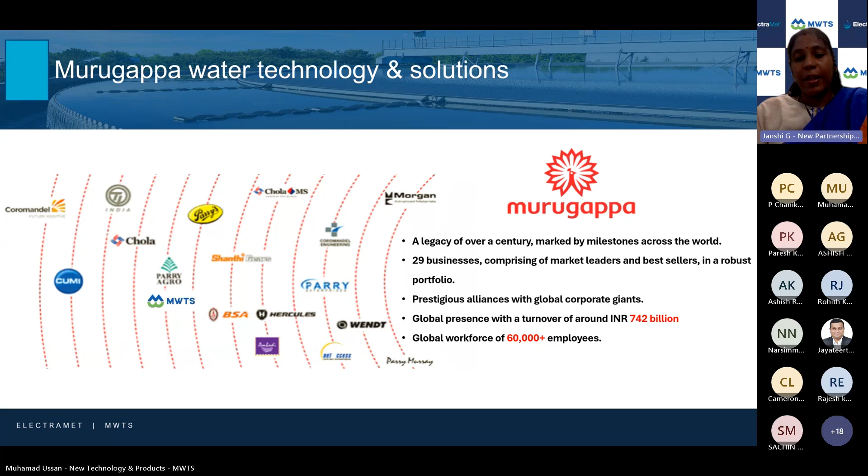We at Murugappa Water Technology and Solutions are a total sustainability and water management solutions provider in the space of water management for more than 4 decades now. I think we are close to around 450 plus assignments completed successfully. We operate under four major pillars, or the business verticals, I would say, to provide the services.

They are the automation. We're there in the complete digitization and automation of your plants. We are there helping the industry with our chemical solutions. I would say rather than a product, it's more of an assistive chemical solution. We are there providing the engineering as total EPC contractors, and we are also there in the service segment providing comprehensive operation and maintenance for the plants which we deliver, as well as the plants which are already there. We do the plant health audit, and we can deliver you a complete operation and maintenance platform. So that is about MWTS.

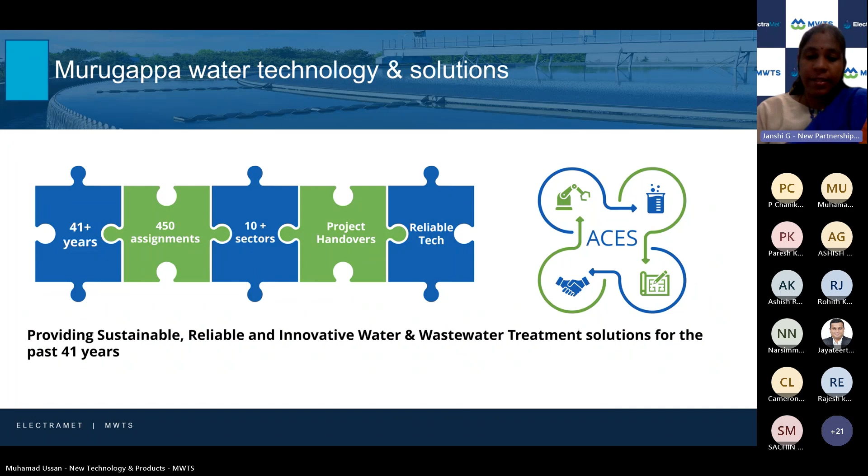So coming to ElectraMet, it is an innovative solutions provider in the field of resource recovery. The focus here is on recovering resources of economical value from the tougher effluents or wastewaters, like from your battery recycling, your mining and metals, your microelectronics and electroplating industries, wherein there is a stress in terms of compliance, and the need of the hour is how efficiently we recover the rare metals or the metals of economic interest.

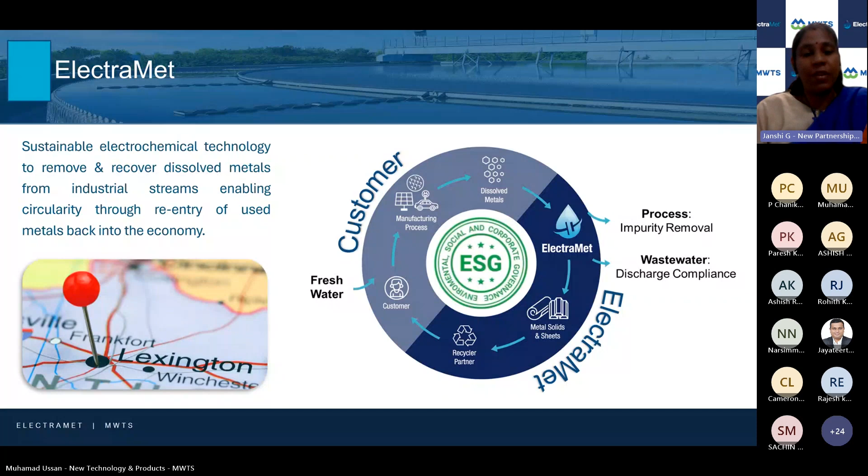So ElectraMet is different from other resource recovery, as Mr. Cameron will explain on the differences. How does it differ from the other technologies out there? So basically, from the US, ElectraMet and MWTS have taken up a joint solution delivery for the Indian market.

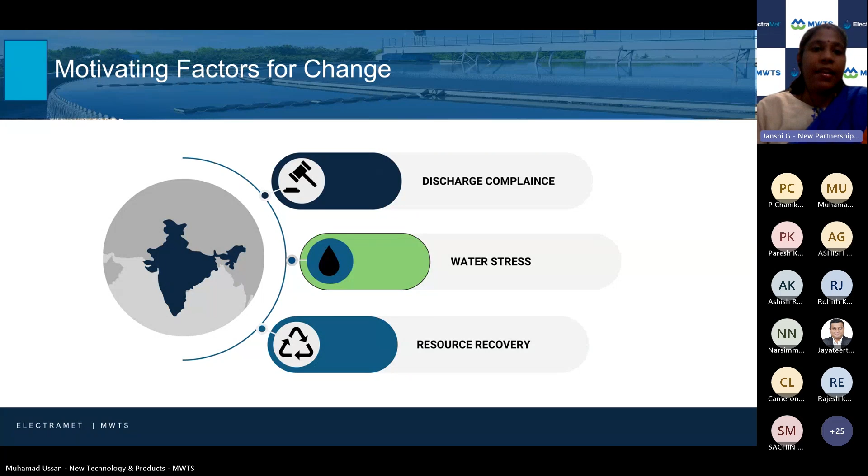Why in India? Because we could see, with respect to these two industries, they are emerging fast, and when the industries grow up, obviously the need for water also moves up. So there are regulatory norms over there. There is water stress, and what is more positive is that there is a secondary or auxiliary market that is getting developed for using the recovered resources from the waste, which otherwise will go unnoticed, and will also pose a challenge of managing them as hazardous waste, wherein there is always a thought behind to recover those valuable metals rather than creating a threat out of it.

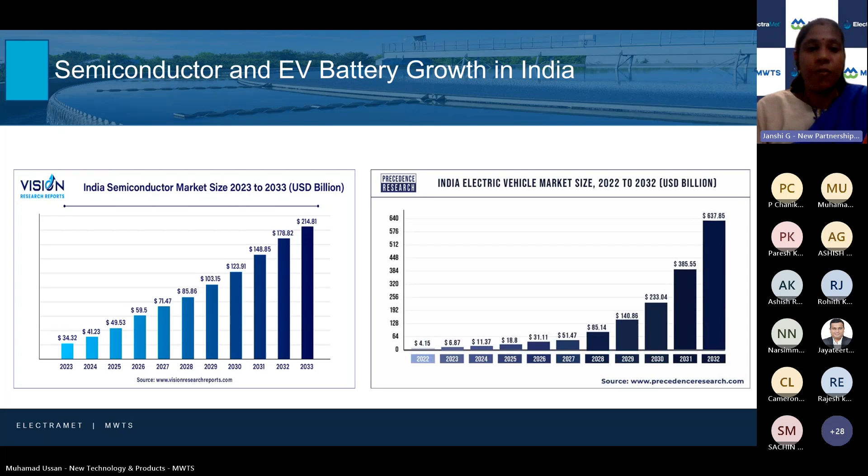So we could see from various marketing insights that definitely India is picking up in terms of the semicon industries, being the fab production or the ATP facilities, and we could see more maturity gaining in terms of the EV segments and the associated battery production, and not leaving the tail end, the battery recycling. The market is getting more matured in terms of battery recycling. When we interacted, we could see more structured processes being set up, and more expansions going on in the microelectronics and battery recycling space.

As we grow in the EV space, probably around the next 3 or 4 years, we'll have to face this challenge of recycling all the end of life batteries from the various vehicles we put on road this year and next year. So the focus towards India is more because while we currently map the global supply chain, the present scenario is that there is an intensity, we don't see much diversification in the supply chain, because as technology providers or resource availability, there is a density in a particular geography, and we could see this trend slowly getting diversified towards India and other Asian countries as well.

So we could see India gaining more momentum because of this current situation, and people either want to become independent, or I would say, like in terms of Atmanirbhar, or they want to create or have multiple choices for the supply chain to go around smoothly without any interruption.

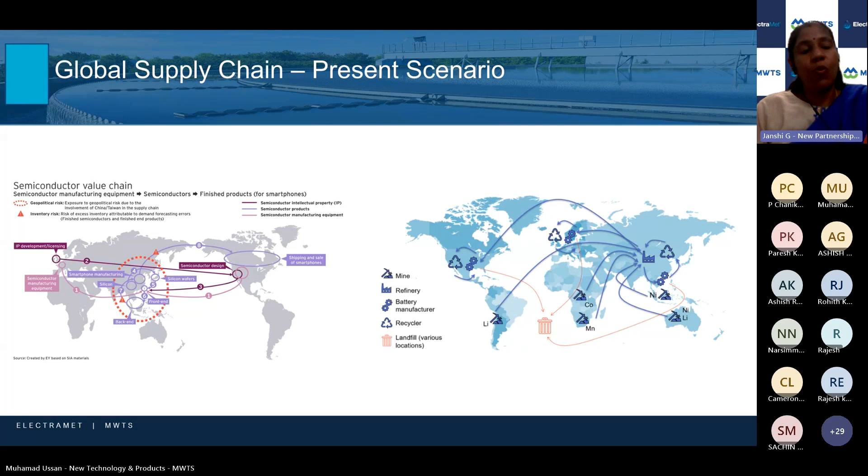With this note, I hand over the deck to Cameron to take us through the application of ElectraMet across both the industries, touching upon the semiconductor as well as the battery recycling. Maybe he'll start with the general flow application, where it describes where ElectraMet is getting pitched in. Over to you, Cameron. Thank you, Janshi.

Yeah, so when we're looking at wastewater in the industry, every facility seems to think they are unique in their water, but if you take a high-level view, every wastewater application has the same general process. You have the target constituent you need to remove, and then you have pre-treatments to get the water to a suitable state that you can process that impurity you need to remove. Then you have the post-treatment, which is typically the final polishing steps you need to meet discharge compliance. Usually some sort of pH adjustment step to neutralize acid or acidify caustic.

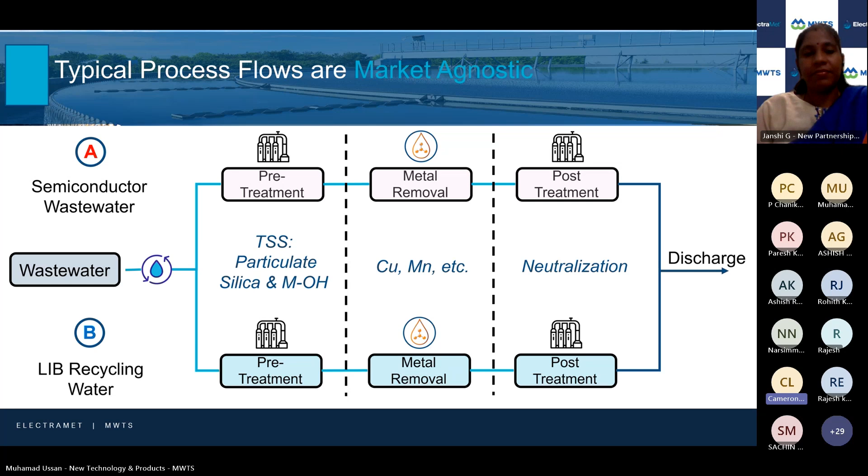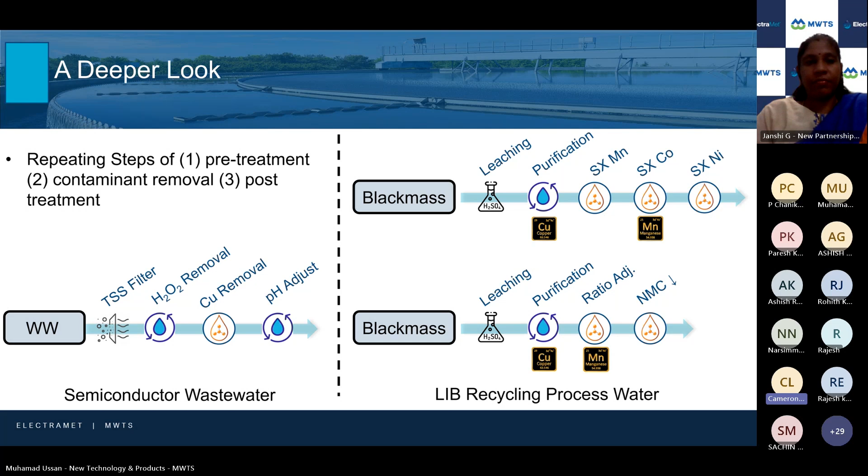And if you look at really every industrial facility, especially in these two industries, you see the same steps repeated again and again. Usually solids, then your target metal, and then neutralization. And so take a little bit deeper look at the specifics of the semicon markets versus the black mass refining, the battery recycling process. There's always going to be a solids handling issue. Then you're going to have some sort of general purification to get the water to spec, target metal removal, and then the final polishing step. So in this webinar, we're going to start with the semicon process and then finish up with the battery recycling.

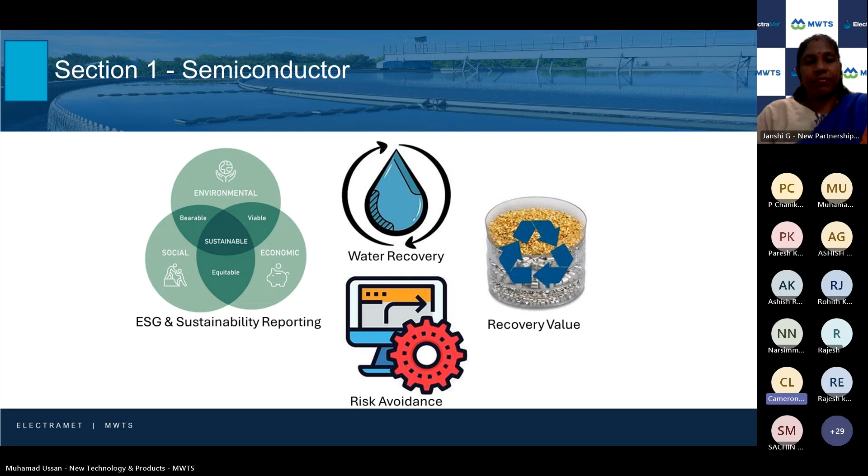And we're looking at the semiconductor market. Not only do you need to meet discharge compliance for environmental regulations, there's now growing pressure to do it sustainably, to use less water or recover water, and to send less waste to landfill. And current incumbent solutions really struggle to do all of this. They're good at meeting compliance, but not so much with the rest of these ESG recovery targets. Next slide, please.

And this is because there are a variety of different types of wastewater in the semicon site that are very, very different. And the incumbent solutions are designed to treat one but not the other. And so the net result is an inefficient process that is really unsustainable. And the two main sources are shown here. The copper CMP is the chemical mechanical planarization process. This is where they polish down the wafer to make it nice and smooth for the chip manufacturing. This is typically processed in-house for wastewater, and it uses probably 30 to 40% of the total water in a fab facility.

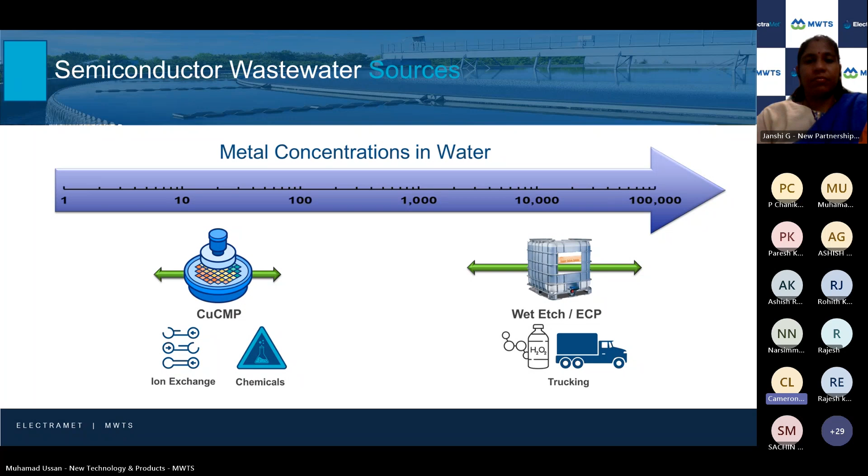And then on the extreme side, you have these wet etches. So these more bulk removal processes tend to be much, much higher concentration, but lower volume. And they also contain a lot of hydrogen peroxide. So the combination of hydrogen peroxide plus the high concentrations of the metals makes it very challenging to treat on site. And so they typically just truck it off. So now there's very expensive trucking costs and very unsustainable environmental impacts from the trucking process.

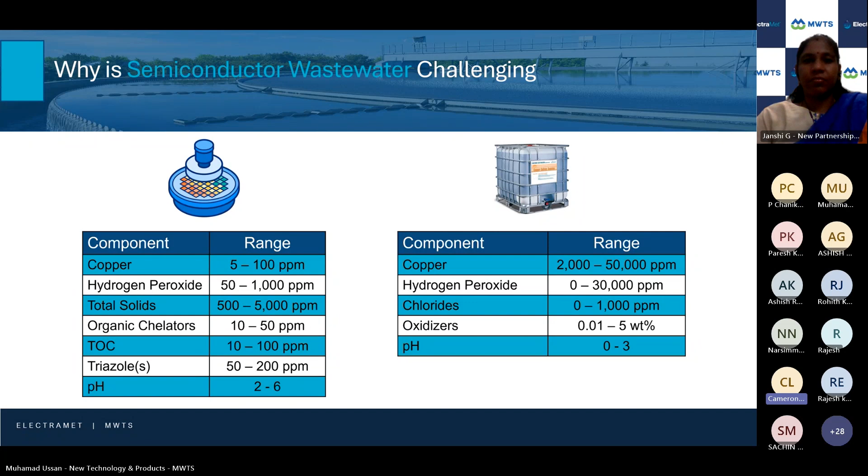And the reason why these waters are so difficult to treat is because there's a lot of stuff in there. If you have pretty clean water with one target constituent, it's pretty easy. For the CMP on the left here, the target is the copper. But you have a lot of hydrogen peroxide in there, solids, organics, and these all tend to negatively impact standard treatment solutions. On the right, you just have a significant amount of copper. That makes solutions like ion exchange chemicals very expensive to process it. So importantly, you have just large amounts of unknown chemicals. So this combination makes it challenging, right?

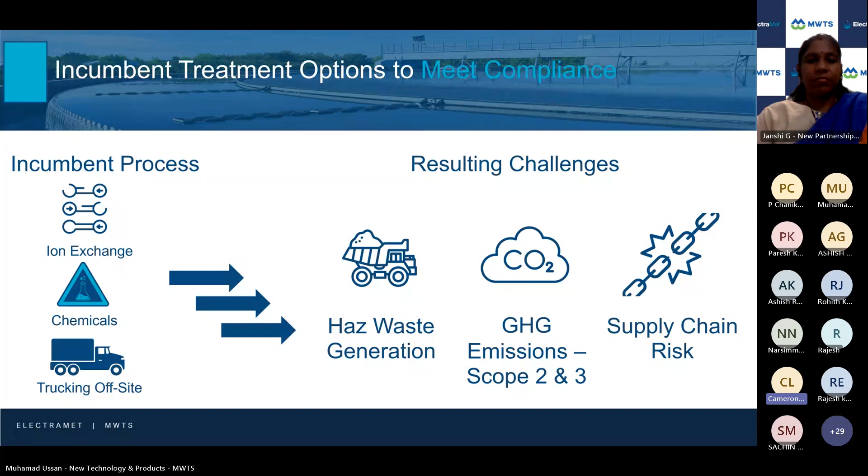As I said, the current incumbent processes have been designed to meet discharge compliance, not necessarily do it sustainably, right? They work very well when that was the only option, right? We now have new options. So if you want to do discharge compliance, meet environmental regulation, and also do it sustainably, we need new innovative solutions.

And then you're looking at, what is the right tool for the right water quality? And this is where the existing solutions are suffering. You can see here in the green, ion exchange, that's very good for the CMP waste, but doesn't work for the concentrate stream. And you look at the electrowinning, it can process part of the concentrate, but it can't get down to discharge compliance. And there's a huge gap in the middle here around that 1,000 ppm range where there's really no viable economic solution.

And that is why they tend to truck off that concentrate instead of processing it down to discharge compliance. Because either way, you have to do some ineffective, unsustainable, high-cost solution to cover that gap. And ElectraMet has solved this problem by using electrochemistry and developing a series of reactors that can process the entire concentration range in a single skid.

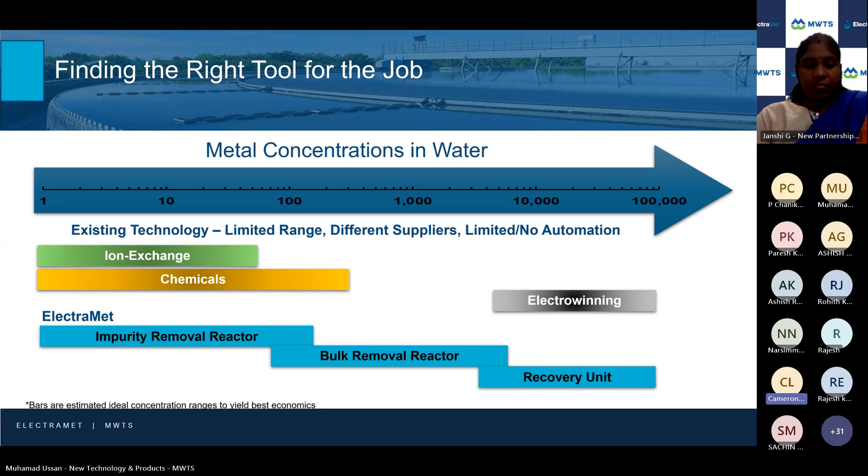So whether you're starting in the lower ppms that you see in CMP, or you're starting at the high concentrations that you see in the wet etch processing, our solutions can then process it all the way down to environmental compliance and discharge regulations, while also recovering that copper as a value add and not sending waste to landfill. Next slide, please.

And we've been able to do this by taking the lessons learned from electrowinning, taking those core concepts of how to plate metals and modify the reactor design to make it more efficient at lower concentrations and make it more selective. So we use a porous carbon cloth cathode, you can see in the picture there, and that is where the water is flowing through. So now you have a lot of high water electrode contact area, which overcomes mass transfer limitations, and that allows you to hit the lower concentrations in the effluent. So we put this in a complete system. You can go next slide.

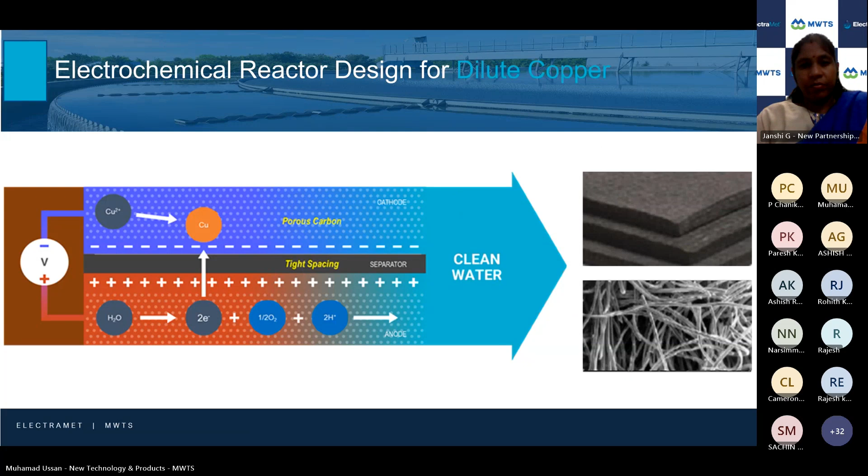So putting this complete process flow for the wastewater at a fab facility, you still got to handle the solids and the peroxide because they can negatively impact the electrochemical treatment. But the key benefit of electrochemistry versus ion exchange is if there is residual peroxide, it will not destroy our media. Hydrogen peroxide will decompose ion exchange resin. If hydrogen peroxide enters our system, it's just a modest inefficiency that it creates. So we'll use the energy to break down peroxide instead of remove copper. So through a combined process, we can develop a more efficient system.

And now the net sort of waste product of our process is a high purity 99.99% pure copper metal. So you can now recover this as a new revenue stream, which helps reduce the total cost of ownership of this process, but also helps you meet ESG goals by not sending any waste to landfill. And more importantly, for every pound of copper that's recovered, that correlates to about 4 to 6 pounds of CO2 that is not emitted because you no longer have to mine that little bit of metal from the virgin ores.

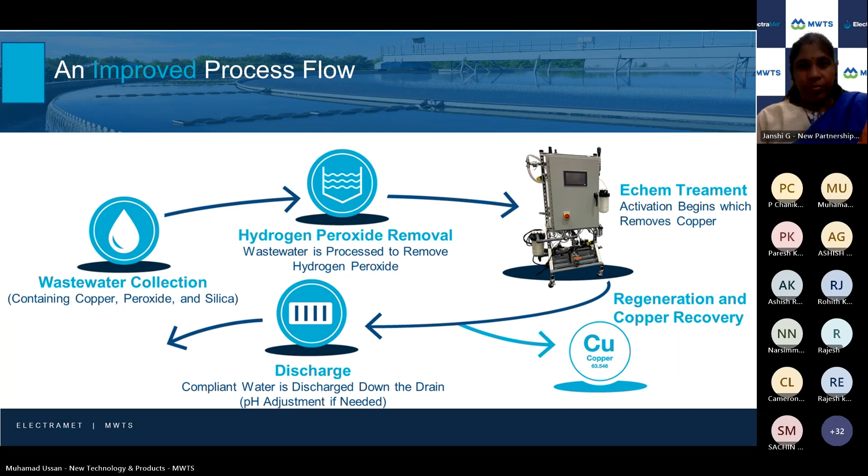Next slide, please. So Janshi is going to take a look here on how the really total process flow comes into place from pre-treatment to metal removal to then post-treatment. Over to you, Janshi. Yes, thanks, Cameron.

So, like Cameron was explaining in depth on how the metal gets recovered, for the complete solution for the wastewater from the battery recycling industry or the semicon, there's going to be a set of pre-treatments to remove the suspended solids because, as explained, this is a porous carbon cathode. So we don't want the recovery of TSS happening in the cathode and the entire cartridge becoming a particulate filter. So we tend to remove the TSS well before it enters into the metal recovery unit.

And depending upon the metal, there is an effective pH that plays an important role. So depending upon the metal to remove and to what concentrations, there could be adjustments in the pH. And this entire technology can remove peroxide, but that is not the intended goal, because we are focusing to take off the valuable metals. So we have a more economic solution for the peroxide removal so that it doesn't interfere with the core technology. But the difference is peroxide does not have a detrimental effect as it does to the ion exchange technology. So we can take care of the peroxide well before the system.

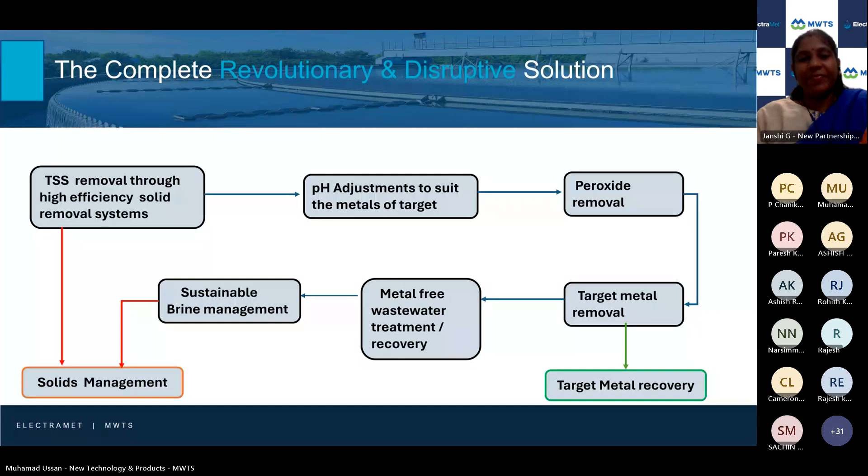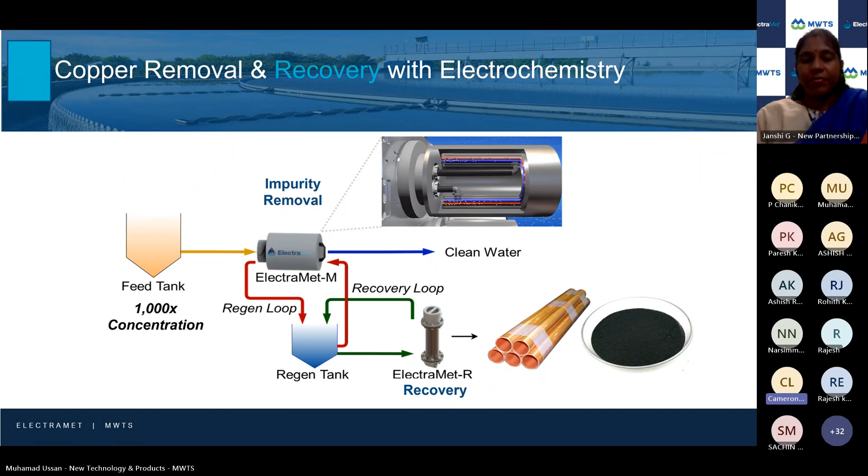Right, we now have gone from what is typically a very dilute metal stream to a highly purified concentrate in acid, which is now perfect for electrowinning. And by doing this, we can have a total solution closed loop process to go from metals in the wastewater to a high purity value add product. Next slide.

And we have been doing this for almost 3 years now in actual fab facilities. Taking CMP wastewater off of this process has a very dynamic feed concentration, but because we operate using electrochemistry, it can automatically adapt to incoming process concentration changes and still meet their discharge compliance. So for this fab facility, the limit was 2.07 ppm of copper.

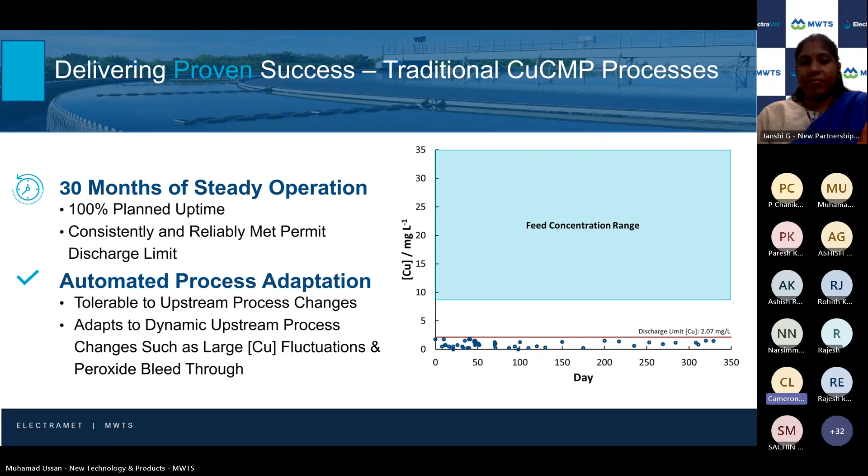And taking on the other side, the extreme side, the wet etch, the electrochemical plating, the higher concentrates, we can now use this combination of our electrochemical reactors to go from very high concentration down to environmental compliance. And we can do this very efficiently from an energy standpoint, but also very efficient from a time and labor standpoint.

And once you get down into the 8,000 ppm range, you start to see the voltage tick up a little bit. And this is happening now because in this reactor, there's a big gap between the anode and cathode. So mass transfer has a challenge. So you have to get that metal molecule from the water to the cathode.

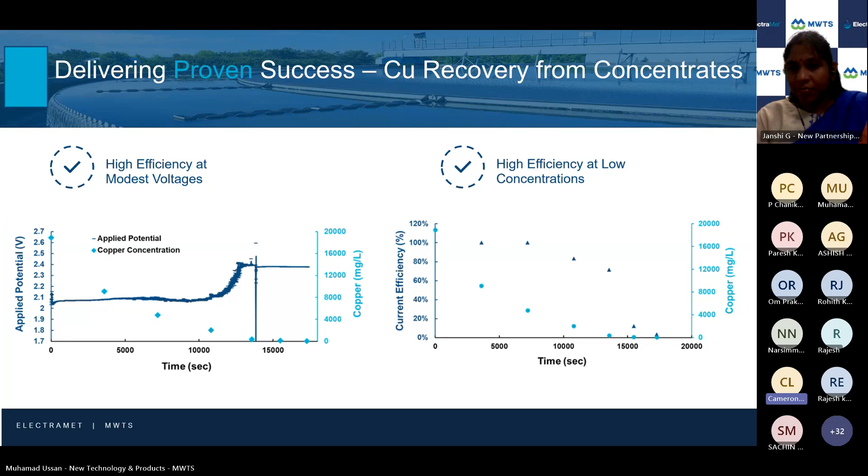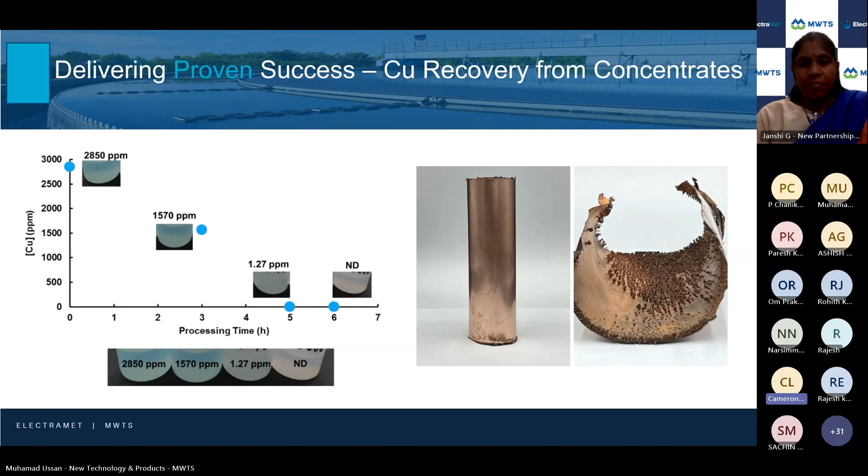We then use our mid-range delta system to take it from 3,000 ppm down to anywhere below 500. And this one we kept going, it's very linear. So that means you have the same efficiency down to about 1 ppm. And in this case, that met discharge compliance. There are always going to be some water matrices where the efficiency will drop off around 500 ppm. In that case, we would switch to our other reactor. Next slide, please.

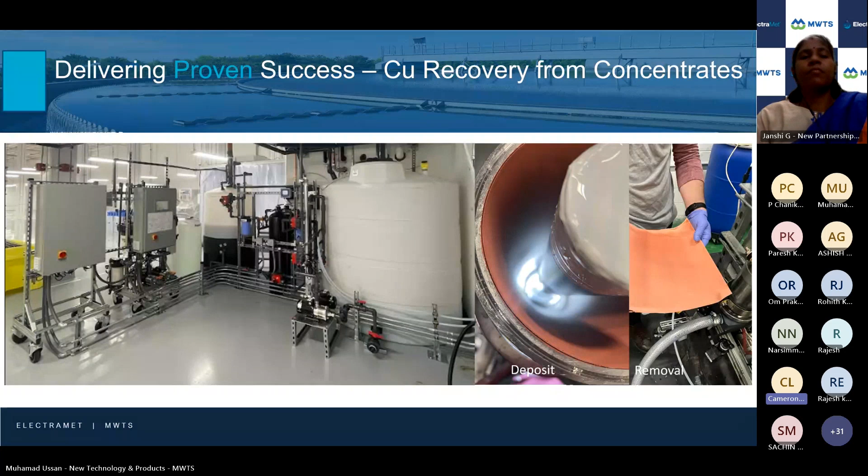And so here is an example of one of our small installations showing the small footprint. Because of the high efficiency and the modular nature of this process, it can be very easily retrofitted into existing facilities, or for new builds, it can allow for more room for production facility because it's a small footprint. We don't need a large space to implement this wastewater treatment system. And on the right here, you can see some of the copper pulled out of the tubes. And so that's going to conclude the semiconductor portion of the webinar.

And now we're going to switch gears a little bit over to lithium-ion battery recycling. And so this has been a very active area all across the globe. And if looking at how are these batteries going to be recycled, there's really a few different methods. You can do it directly, direct recycling, which we take the battery cathode material, do a little cleanup process, and put it right back into a battery. You have the hydrometallurgical process, which is you're going to shred the battery, get the black mass from the electrodes, dissolve it in some sort of leaching solution, and then separately isolate all the products you want. This is very similar to what is done in the mining industry.

And then the current method that's done today at a large scale is pyrometallurgical. This is where they're taking existing furnaces and refineries and taking the black mass from the shredded batteries and putting it into a smelting-like process. So it works, but it's very energy intensive and very environmentally unfriendly. Most of the new facilities being built are doing a hydrometallurgical process, mainly because of the lower CO2 footprint, lower energy requirements. Next slide, please.

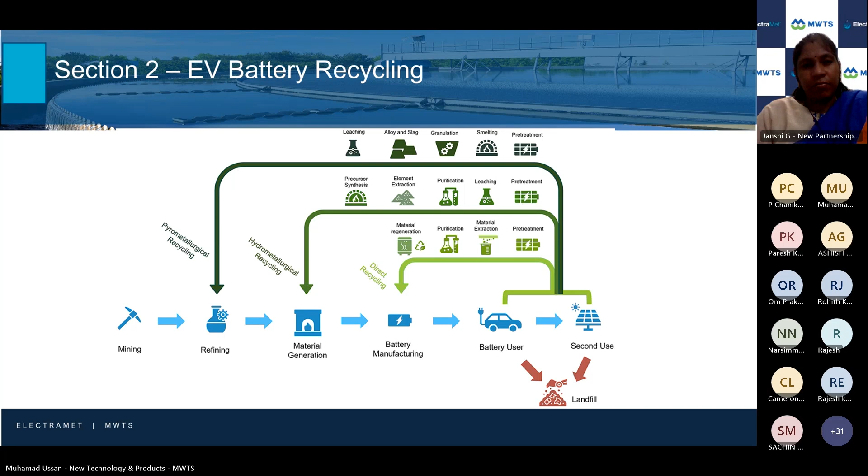And so where ElectraMet can fit in is battery recycling has usually very complicated flow sheets. Removing bulk metals is pretty easy. There's lots of solutions to do bulk recovery. But in the battery recycling process, you need to hit battery grade products. That is a very high level of purity that needs to be achieved. And ElectraMet can bolt on after these bulk removal processes for more efficient, higher purity products at the end. Next slide, please.

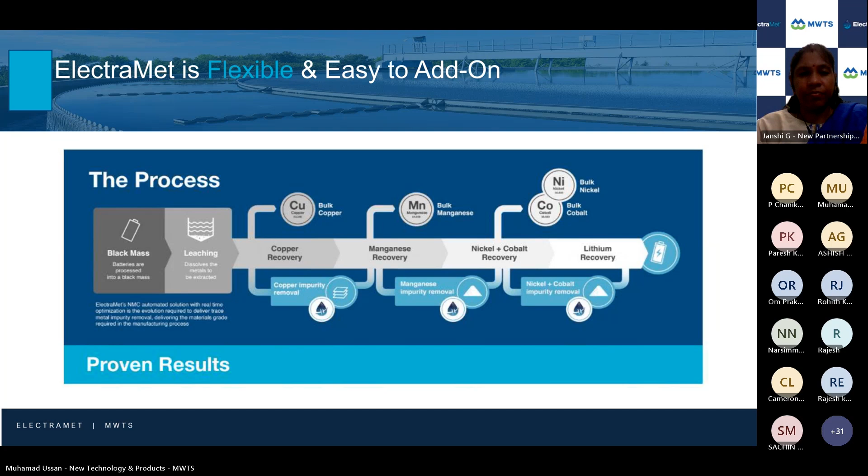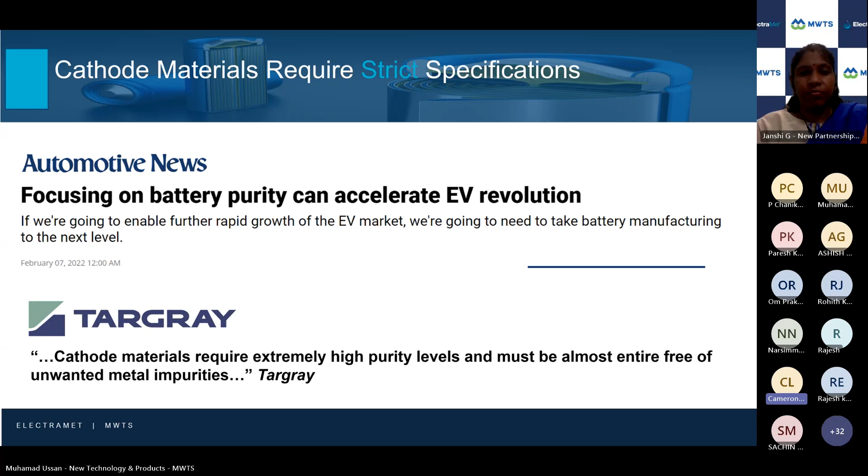And why purity is important is even the smallest bit of impurity in a battery can destroy its performance. It can reduce, next slide, please, reduce lifetime of the battery. Next slide, please. Right, it can reduce the performance, so it won't have many charge cycles. So instead of getting your 200 miles of range, you might get 30 miles of range.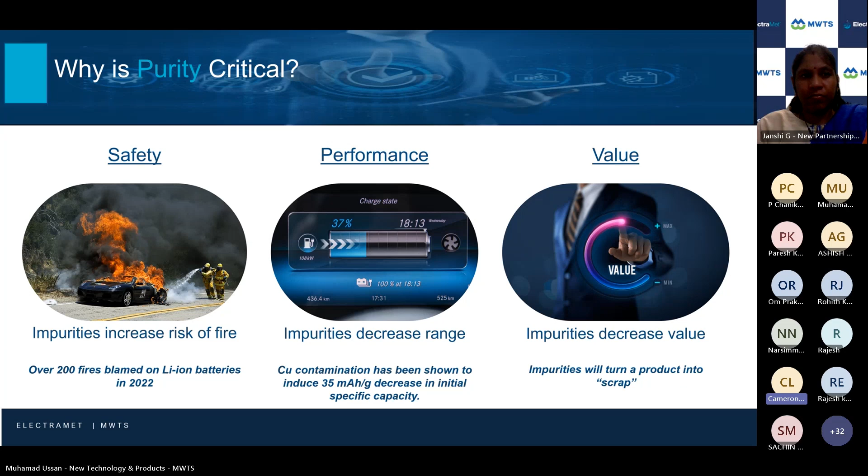If you have these impurities, it can result in unwanted reactions within the battery, and that is a big risk of fire. It doesn't become could a fire happen? It becomes when will the fire happen? So a lot of safety concerns will happen, and there's a lot of increased value in battery grade versus these technical grades because of the high need in these batteries. Next slide, please.

In the recycling process, there are really 3 pillars you have to hit to have a sustainable and viable operation. You have to have high yields. You have to have good economics, both of your operations and of the product you're producing. And you have to have high purities to be battery grade. Hitting 2 out of the 3 of these is very easy. Hitting the 3rd one is near impossible with today's solutions. It can be done on a very small scale, or it can be done on an absolutely massive scale. But most plants will operate in that mid-range where we need new innovative solutions to hit all 3.

And it all depends. Go ahead. Yes, the Indian industries are growing with this pyramid. We could see a lot of firms hitting the MHP and metal salts, growing slightly towards the pre-CAM and CAM. But as you rightly said, evolving towards high purity battery grade materials is more emerging. So it is even nascent, but I think we will mature more in that.

Yeah, so it's all dependent on what product you want to make. And what we're seeing today with people in the US, Europe, and some of China is the main focus is get lithium out - that's pretty easy to do by itself. And then make MHP. It's very cheap to make MHP, but there's not a lot of margins. So it is only viable now. It will not be a viable product in the solution.

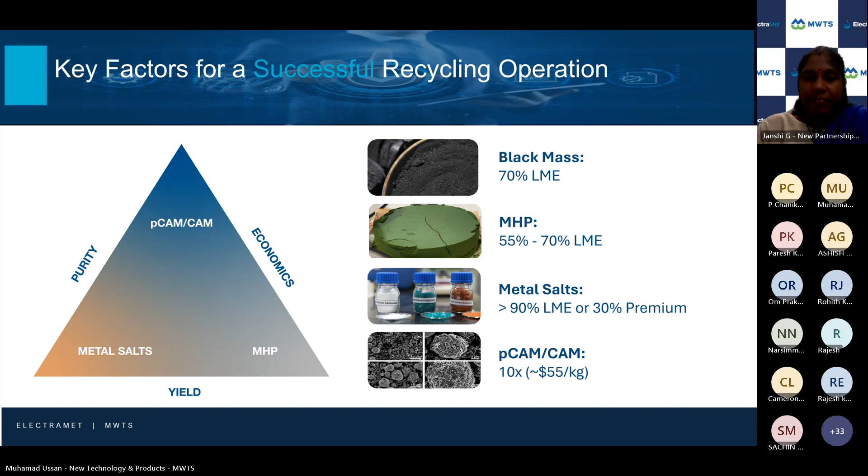Right, if you don't have that purity, you can't make your products. You just have a commodity metal, which is now not competitive in a market versus other ways to get commodity metals. So what I've done here is pulled a number of specifications from a variety of PCAM, CAM, and battery grade metals products. You can see copper is a big one, manganese is a big one, and cadmium, right? But there shouldn't be any cadmium in EV batteries in the first place.

We have seen a number of black mass providers that have cadmium in it, and this is most likely coming from people mixing in nickel cadmium batteries. Even one battery in a large recycling plant can produce enough cadmium to be out of specifications.

And if you look down at the precursor NMC - so this is the nickel, manganese, cobalt type lithium-ion batteries, these are the cathode materials we're using for these higher value EV cars, these higher ranges - the purity requirements are very strict. Standard hydromet processes used in the mining industry cannot hit these targets, or they cannot hit these targets while meeting the required yields to make a viable economic business.

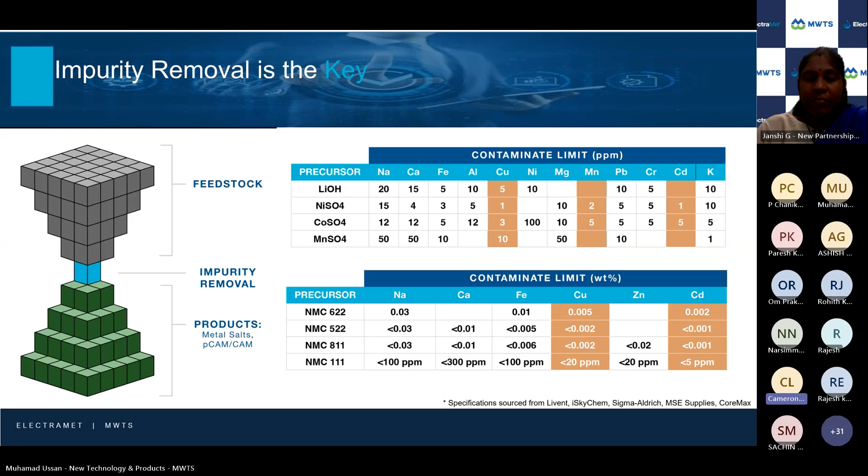So here's going through a little example: if you have a standard black mass composition shown on the left, what kind of values can you get out of it, shown on the right? On the top right is just showing, on a purely same mass basis, what is the value of the different products. You can see that CAM is extremely valuable compared to everything else - that is the most valuable product. Battery grade metal salts are also very valuable, but if you only hit tech grade, you're going to lose a lot of value. More importantly, if you normalize it based on what you can get out in the yield, based on the black mass composition, this bottom right figure shows what kind of operation you could get. And it still shows making CAM is the most value you can do.

The metal salts, if they're battery grade, could be very lucrative. The challenge is if you don't get to battery grade and you hit tech grade, that is going to be significant value loss, because the cost to try to get to battery grade is going to be very high. And if you have to reprocess your solution again to get to that final grade, it's going to cost you a lot and ruin your economics.

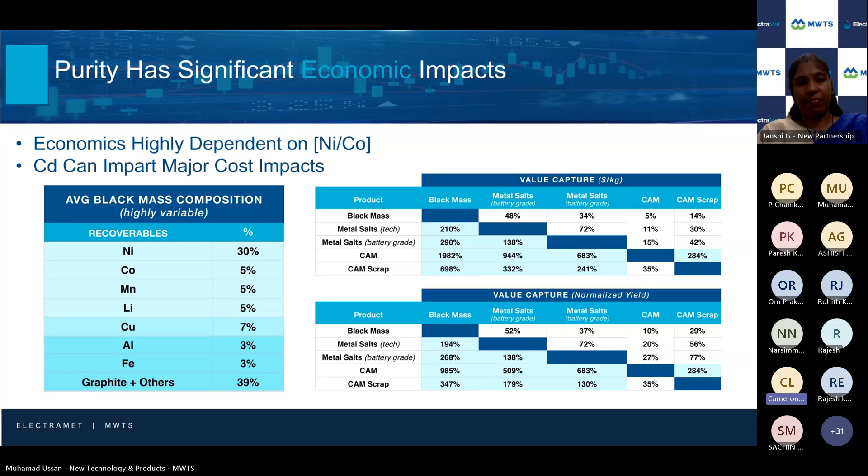So looking at impurity removal - what are the different methods and what are the main impurities? From what we've seen, the biggest impurities causing problems are copper and manganese. How they fit in will depend on what product you're making. So on the bottom left here is a very high-level flow sheet of a process to make different battery salts. The goal is to make cobalt sulfate battery grade, nickel sulfate battery grade, and manganese oxide or manganese sulfate battery grade. Once you leach it, there is significant amounts of copper in the black mass coming from the current collectors of these batteries. Now, getting the bulk out is pretty easy.

You can add sodium hydroxide as a base to precipitate out iron and aluminum, and maybe 90% of the copper. But that's still not enough. So typically what they would do then is sulfide precipitation or ion exchange to try to get it all out. This results in significant yield loss, which means losing economic viability as a business.

Looking now for manganese, typically you add some sort of oxidizer to precipitate it out. This can work well in some streams and not in others, but also you're going to have some yield loss of cobalt. You will react with the cobalt, it's not selective, and now you're losing product.

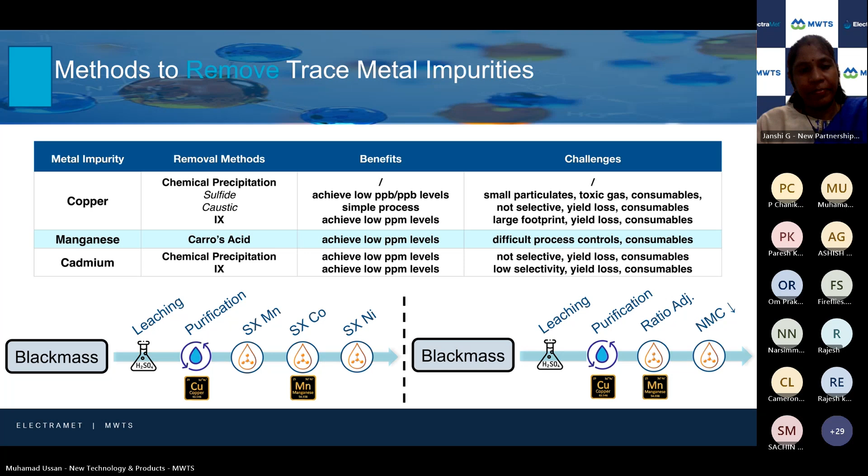So we're going to go through a little bit of the existing methods and really dive into why they might work for the mining industry, but not for this. For copper, the standard process is chemical precipitation. What I'm showing here is a solubility curve of the different metals versus pH.

Adding sodium hydroxide and doing metal hydroxide precipitation works very well for environmental compliance on a lot of wastewater. The problem is, as you can see, every metal here is going to come out. So if you have to get copper out, you're looking at between pH 6 and 8 to get it out to purity levels. But also you see the curves of nickel and cobalt are also not soluble in that range—so it's not selective, it's going to get all those metals out.

So what I've looked at, if you go forward one step, this is looking at sulfide precipitation. Can you advance one slide, please?

Now, when you do sulfide as the chemical, the solubility curves shift. If you look down at the bottom left, that little pink line is copper—you can get copper out very well to very low concentrations, but it has to be very, very acidic. The problem is sulfide plus acid makes hydrogen sulfide gas, which is very toxic, so the safety concerns are not conducive for a lot of facilities. And if you get a little more alkaline, even pH 2 to 4, you now see all the nickel come off, all the cobalt come off—mainly that blue line—so now you're losing all of your product.

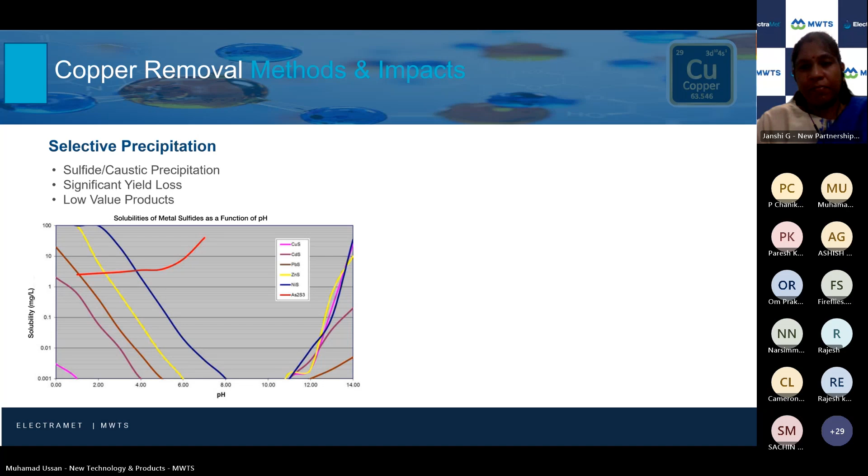Advance one slide, please. And similarly, if you look at ion exchange for copper—this is an example taken from a mining facility where they're looking to remove copper from some cobalt. This only has dilute amounts of cobalt, and they have to do about 200 bed volumes before it stops taking cobalt out. What's happening is the ion exchange is not selective enough—it's pulling all the cobalt out with the copper and every other metal, and then after a while, it slowly equilibrates and only takes out copper.

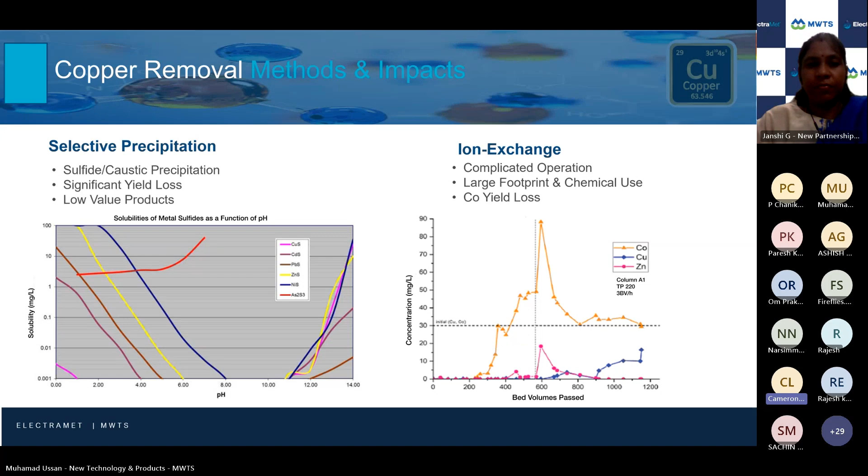So you're essentially saturating and using up 50% plus of your capacity on metals you don't want. And once you get to the black mass leachate, where you're going to have 30,000, 40,000 ppm cobalt, it's going to even be worse. It's going to exacerbate. So you have to spend half of your processing time just preparing the ion exchange resin to be able to be used for copper. And this also introduces a very high risk of yield loss of that cobalt if you don't do the exchange properly, if you don't have the right regen, if you don't recover the cobalt from that regen solution. So while it may work to get to the purity, it is just too much yield loss, and the operational burden from a labor and a process flow standpoint, and also a footprint, is just not really viable in our view. Next slide, please.

And here's just kind of, again, showing you a little more example of the yield loss from precipitation. This is some data pulled out from a German research institute, showing real data that nickel and cobalt will come out if you use chemical precipitation. But the ion exchange is just massive, right? The capacity for these copper selective resins is not big enough. So you end up having half of your plant is now ion exchange just for a polishing process instead of doing a production. And every time you do a regen, every time you expose it to these different metals or any kind of peroxide, any kind of strong oxidizing acid, it's going to break down that resin. So now you don't know what the capacity actually is, so you have to over-design, oversize these resin beds to make sure they are functioning. And it is a massively burdensome process. Next slide, please.

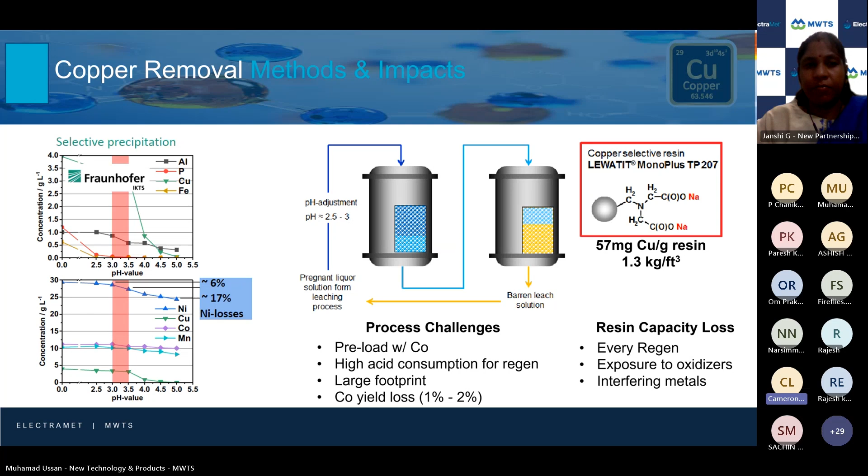And so here is a full flow sheet example, this is actually designed by Solvay using their solvent extraction process. You can see they do a bunch of different steps. Usually a solvent extraction to kind of pull away the bulk of one metal, and then a polishing step. And then another solvent extraction to pull away the bulk of the metal, and then a polishing step. And so what we're seeing here is, even through their impurity removal process, there's still too high levels of copper and manganese in these different product streams. So from the very beginning, copper is a big problem. The solvent extraction, the chemical precipitations are not hitting purity requirements, which is going to be 1 to 2 ppm max on these product streams.

And if you look here, right after step 1, that impurity SX, the D2EHPA, call it DEPA, is usually very good at bringing out bulk manganese. And it's good at bringing out trace metals, but it's still not good enough, right? It gets 95% of the impurities out, but you need 99.99% of those impurities out. So what that does is those small impurities are then transferred downstream to each of these other individual steps, where they now may be even more difficult to remove from that product stream versus if we could do it earlier. So the cobalt SX, the Cyanex 272, is the most common process in all the facilities trying to recover cobalt. And it is very good at sucking up manganese. So you can see that bottom right table there, there's still a significant amount of manganese in that product stream.

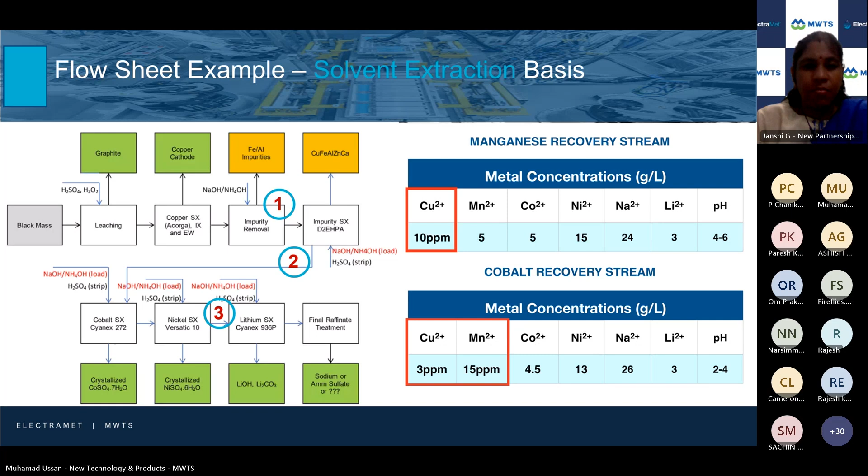Okay, so that was making all the different metal salts. So here's an example flow sheet of going straight to the cathode active material process. It looks very similar, right? You still have the copper removal and impurity removal. The only difference is instead of making a solvent extraction step for cobalt, a different one for nickel, a different one for lithium, they're now taking that sort of purified leachate, once you remove the copper, and trying to make the cathode material directly from there. So you do chemistry on this, what's called an NMC solution. You add in a variety of chemicals, and it produces your cathode active material process. Again, challenge here, it has to be very, very pure. So Cameron, with ElectraMet, can you just throw some light?

Which of these steps can be totally eliminated? Like you don't have to do a series of different chemical additions for the bulk removal, for the polishing, right? We have got a family of reactors starting from alpha, beta, and delta that can do the job. Yeah, I think it's more of not necessarily removing process steps. It's that these process steps won't actually work at scale because they haven't built plants yet.

So look here on the residual impurity removal IX, that is what we would replace. And we would be much more sustainable, much more reliable, and efficient to actually hit the purity requirements in a smaller footprint. You can potentially take the upstream processes. If you look at the copper SX or the impurity removal, you could use less energy there, and you don't have to hit the removal contents then because we can do it downstream.

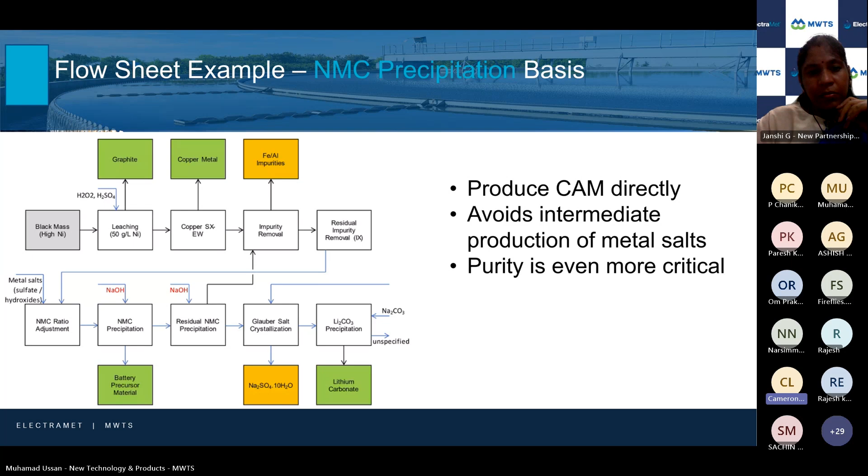So here's giving some real world examples of this black mass leachate for these two different streams. So the one on the left is a client that wants to make the cathode active material directly. So they have the mixture of their nickel, manganese, and cobalt. They don't want to lose any of that. They just want the copper out.

So we're flowing this real black mass leachate through our system, and as soon as we turn it on, you can see the copper comes down, and we're hitting the specifications of less than 2 parts per million. And we don't touch the cobalt, the nickel, or the manganese, so that their product is in the right ratio. They're good to go. All right, using a single pass operation, very high efficiencies. So that means all the energy going into our system is being used to remove the copper and not other parasitic reactions.

And on the right, this was a sample from a client who has the final cobalt SX product stream, right? They want to sell this, but the manganese was too high. So traditionally they would add what's called Caro's acid, so sulfuric acid, peroxide, other chemicals to force oxidation of manganese and precipitate it as MnO2.

By doing that, you are now going to input stuff into your product stream. You usually have to adjust the pH as well. So all these factors result in the yield loss of that cobalt, and also add on more processing steps, which increases the cost of hitting that high purity battery grade cobalt.

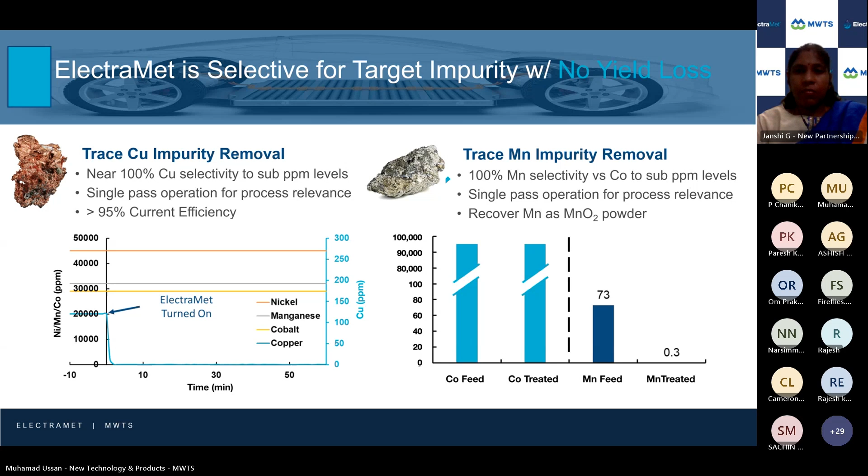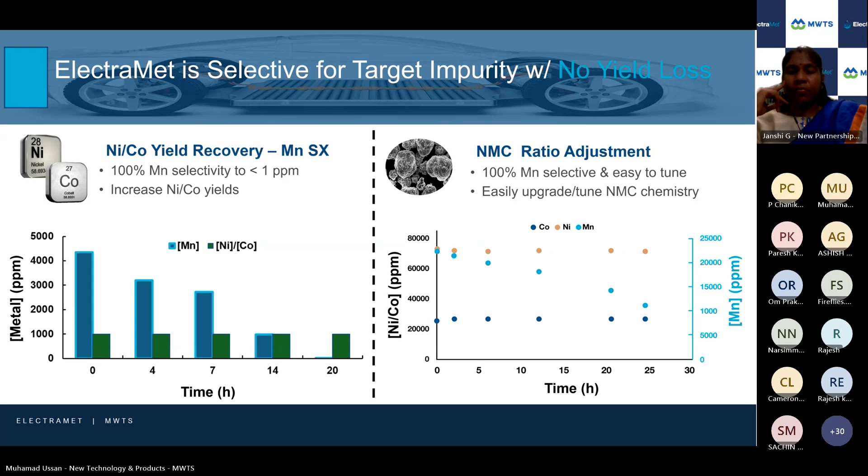It is rare that we ever operate at max capacity. It's going to fluctuate up and down depending on the incoming feed process. And the handling capacity is also going to fluctuate based on the concentration of the metal and the flow of the stream. So we operate more on a metal flux process. How many pounds per day are you processing through how many modules? So we will optimize that design engineering to best fit the process.

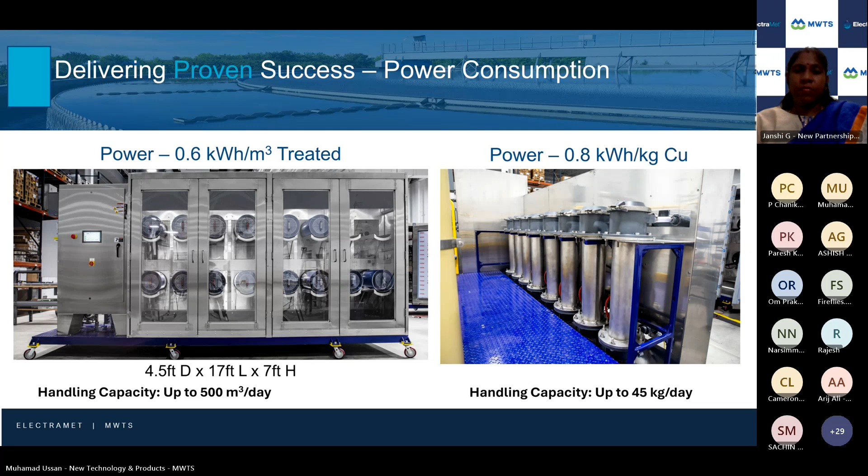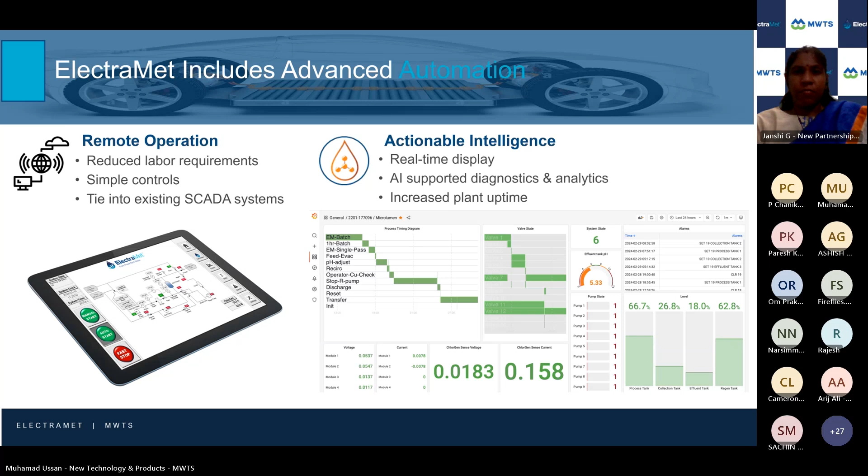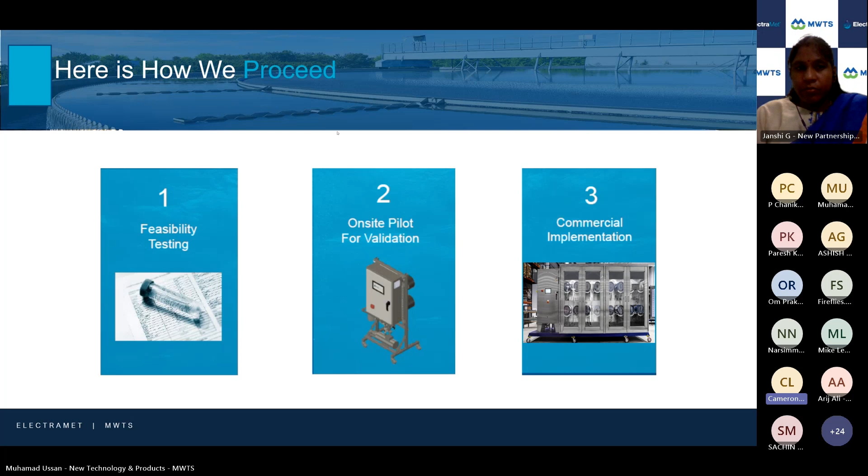There's a question, Cameron, from Naveen about extracting each and every element from wastewater or only specific elements, mixed metal streams. Yeah, we do have the ability to target a number of metals. I don't think we have a slide on that. But we can do copper, silver, gold, manganese, the PGMs, so platinum, palladium, you can do some tin, lead. Really, if you can do any kind of electroplating, electro-oxidizing, we can get it.

Ones we don't really target are things like zinc. Nickel, cobalt are going to be very case-by-case basis. But typically anything on that sort of transition metal block on a periodic table is most likely targetable. Things like selenium, arsenic are a no-go. Most of the metalloids and non-metals are probably a no, but possible. But usually right in those triads: copper, gold, silver, the PGMs, manganese, tin, lead are sort of the sweet spots for us. But if you have one we didn't list, we would be interested in learning more and taking a crack at it.

Yeah, Cameron, I posted a mixed metals approach. Can you talk a little bit about what it shows? Basically, it's kind of the different voltage potentials. So it shows the cartridges, and then kind of just the escalating voltage that may help with that conversation. I see it. Yeah, so we use what's called the electrochemical series. Essentially, every metal has a voltage you need to turn it from dissolved into metal. And we will put these cartridges in series and get the lowest one first. For example, we can get silver out at a very low voltage, so that will come out first. Then the next one can do copper at a slightly higher voltage. Then we do things like cadmium, tin, lead at higher voltages.

And then you start getting to this range where you're about the same voltage to make hydrogen gas, which is why it gets very finicky with nickel and cobalt. So you have to have very precise water chemistry and operational parameters to get the nickel and cobalt out at these higher voltages. Things like PGMs are going to be very, very low voltages, even lower than silver. The ones like manganese, that comes out in a different reactor design, but it's still pretty low voltages. So basically just on operational voltage, we can line these up and design these to target what metals you want. So it's just like dialing a knob on each one, setting 1, setting 2, setting 3. No process changes required.